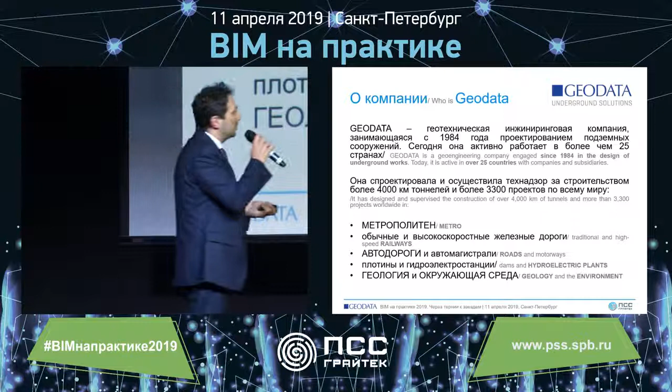Why am I here today, and why am I not here today? I am not here to bore you with another boring conference, or at least I hope not. I am here to explain, first of all, how difficult it is dealing with BIM in underground projects, in a company that develops underground projects and infrastructure projects.

Why? First of all, because we don't have a single element located in a specific position. There is a high relationship with the ground. We have to deal with many software that have to be interfaced, and we have to force them, because many times we have to ask the software to do something it is not able to do. So we have to program. And above all, we have to deal with people.

So the change is very challenging. Many people tell you, why do we have to change, why switch to BIM software instead of CAD, because we are able to use CAD. Another important sentence I heard across last years is that BIM will do everything automatically. It is not true. BIM doesn't do anything automatically. You must know the software, you must know the limits of the software, and then BIM can do most things automatically.

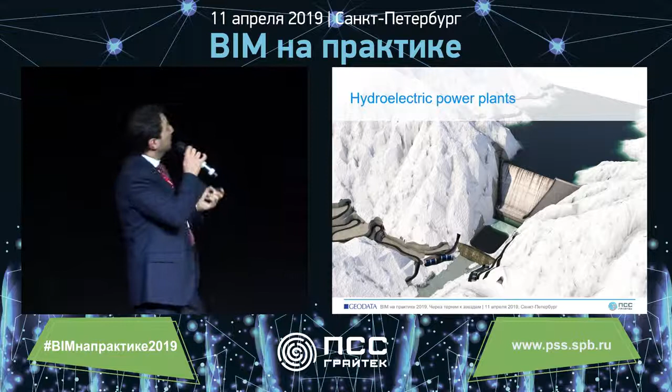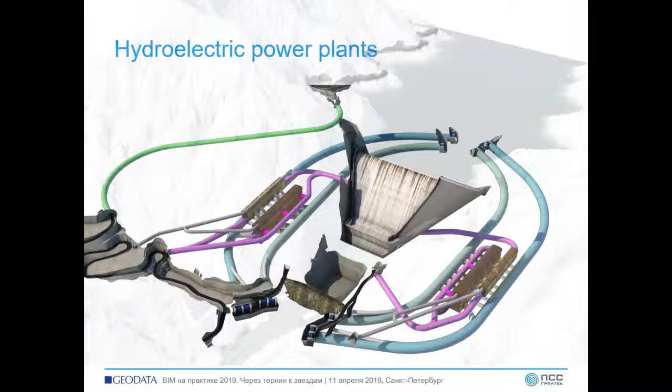Going deep into our topic today, I'm going to show you how we realized a hydroelectric power plant project. It's a very complex project, because we have a lot of elements, and each element had to be modeled and designed with different software. So this was the first important challenge for us.

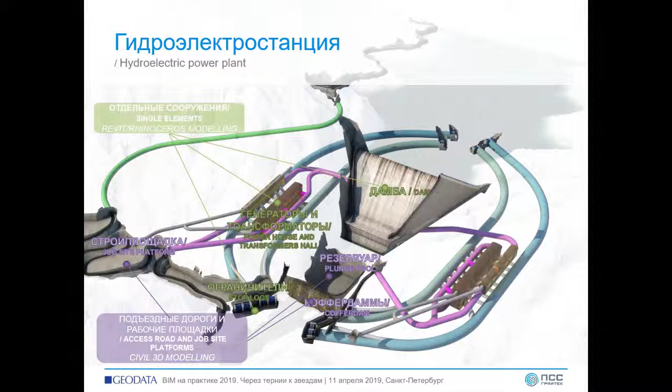First of all, we had to realize, using Civil 3D, the job site platform, cofferdam, and plunge pool. Then we switched to another software, Revit and Rhinoceros, to realize the dam, powerhouse, transformers hall and stop logs. And then, for linear elements such as tunneling, we had to realize the project using Civil 3D, but then we switched to Dynamo and Python to realize the model inside Revit, just to put information inside that.

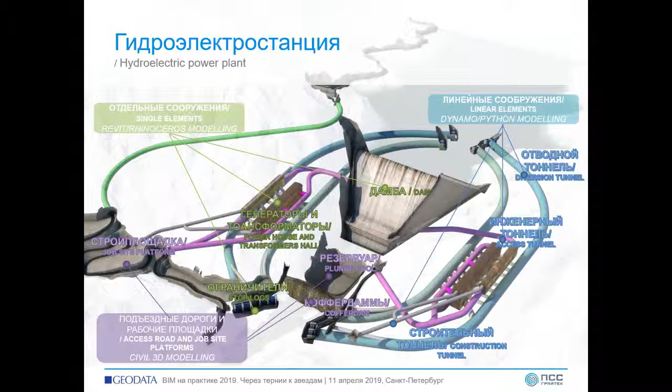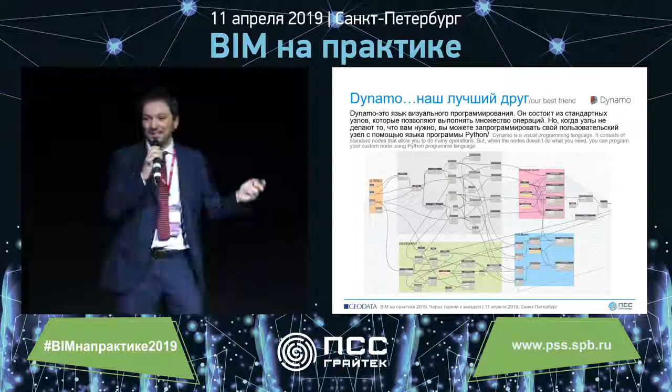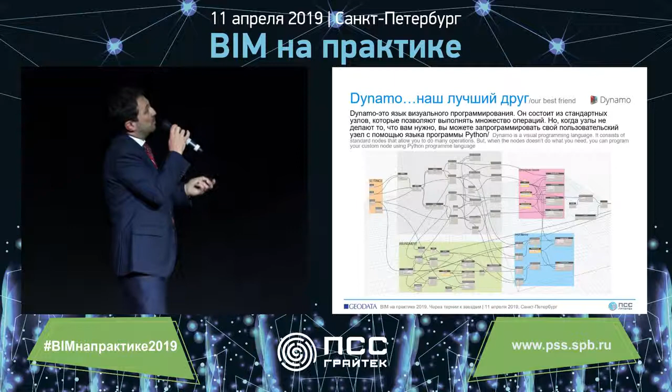What is Dynamo? It has been presented just a couple of minutes ago, but I would like to state something more. Dynamo is a visual programming language. It is very simple because there are a lot of compiled nodes, so we can just choose the nodes we have to use, connect them with logical connection wires, and then we can realize the whole automatic process inside our model.

But what happens if we don't have the nodes that can do what we have to do? We have to program it. So we have to switch to Python, and we have to realize our custom node. This is a little different from Dynamo, because we have to be able to write the code, so we have to know the syntax of the programming language. Python is a simple, object-oriented programming language, and the most important thing we can do with Python is enter inside the software with the Revit API. So we can break any barrier located between us and the software, and we can do whatever we want.

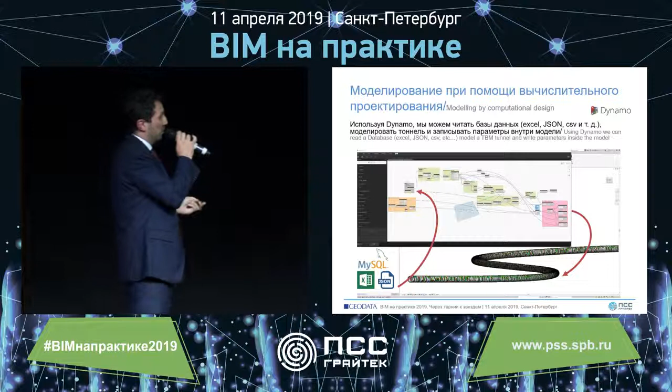How do we use Dynamo and Python? We realized a workflow, a code, in which just by taking input information from an Excel file, JSON, or MySQL, we can realize the tunnel.

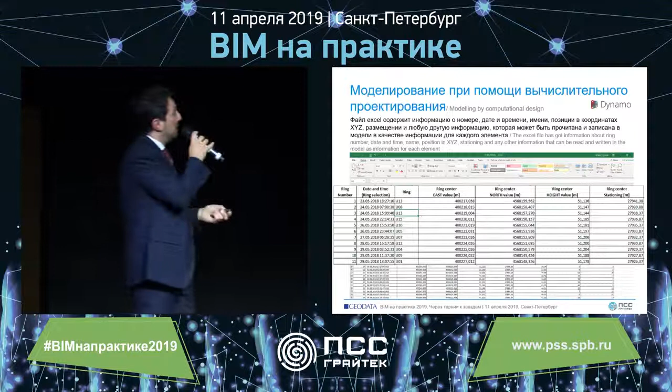So we start with an input data Excel file, for example, in which we add X, Y, Z coordinates that arrive from the alignment, and other parameters important to model the TBM tunnel. Just by reading the coordinates, we are able to recreate the alignment inside Revit and put each ring of the TBM tunnel in the right position and with the right rotation. This is the rotation of the element.

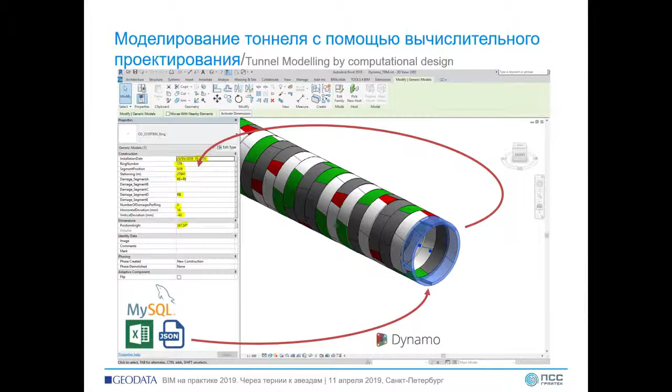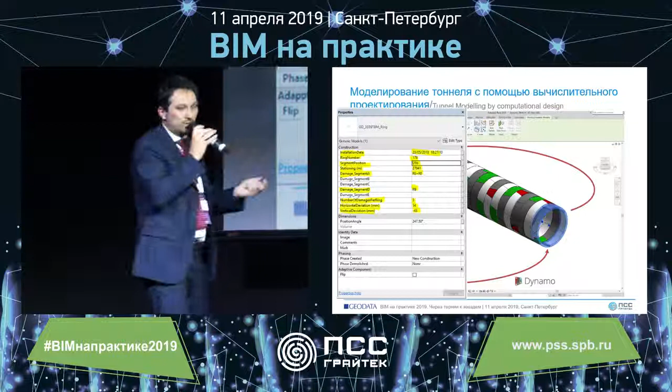Yes, because these colors are not casual. This color represents the correct position of the ring and its correct rotation. But moreover, the most important thing is that when we are modeling it, we can also write information inside each ring, such as installation date, ring number, segment position, stationing, the damages found during construction, and also the horizontal and vertical deviation, just to make a comparison between the design and the construction.

Well, we can deal with Excel files, JSON files that are located in your local machine. But what about cloud-based files? We can just create our custom node with Python, connecting the model to a database, to a MySQL database, and just write all information inside MySQL, or simply read that.

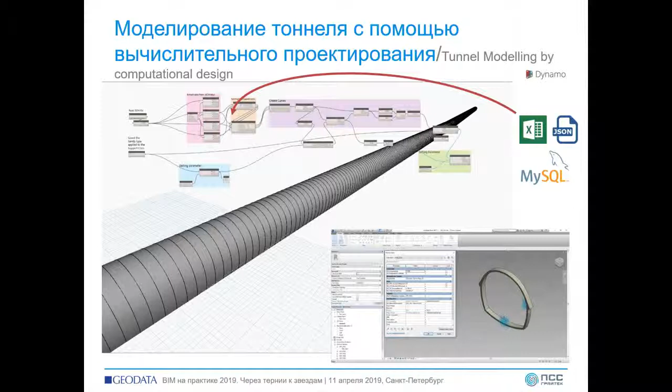This is another kind of tunnel. This is not TBM, this is traditional tunnel. The workflow, talking about BIM, is completely the same. Nothing has changed, only one thing: while in mechanized excavation we have a ring that has got the same excavation step because it is prefabricated, so it is the same, in this case it is not the same.

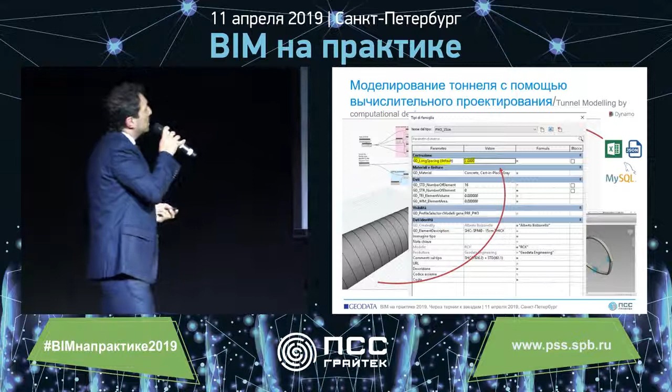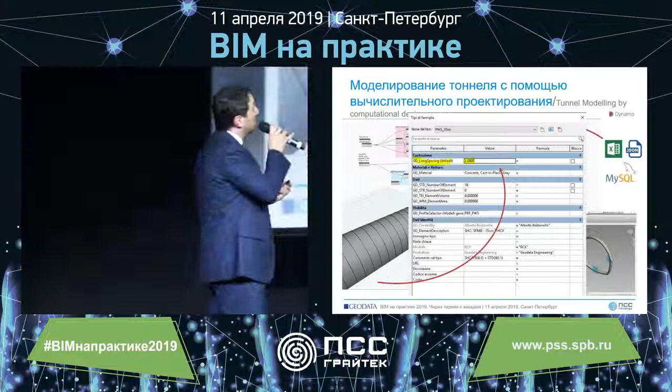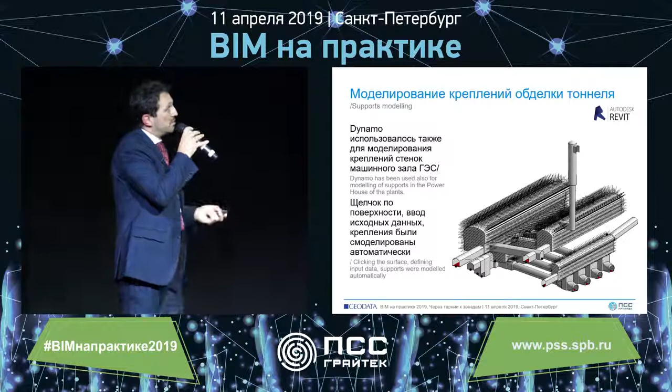When we have to realize the model, so when we have to model each element, each support, in the Powerhouse and in the transformer hall - why? Because there is a lot of interconnection between many caverns, and the only way to check the interference between the supports was to model them. But you can imagine easily that modeling all these elements by hand is crazy.

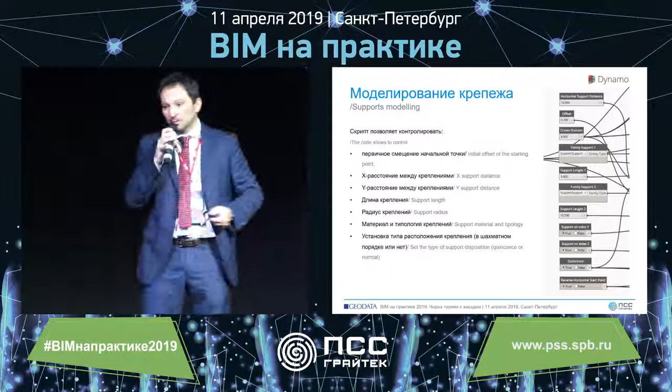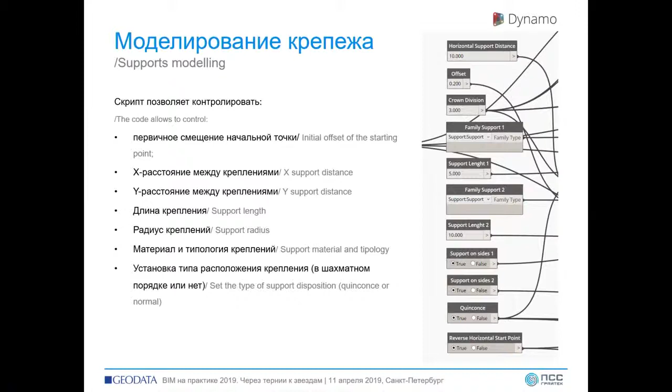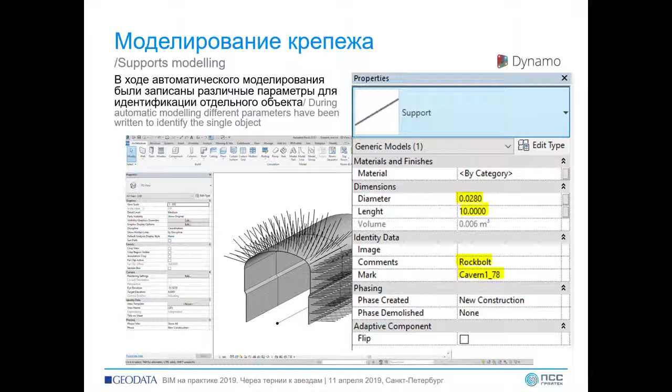So we realized another Dynamo code. Just clicking on the surface and putting a lot of parameters - X support distance, Y support distance, support length, support radius, material and typology, and so on - we can have our model designed automatically. And above all, we can write inside each element whatever you want: diameter, length, name, typology of the support. All information important, very important for the bill of quantities, which is this.

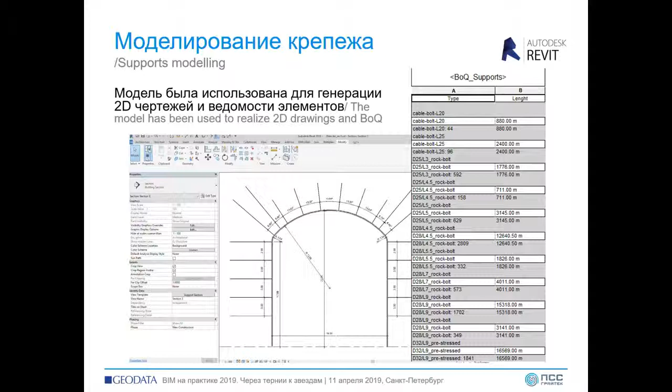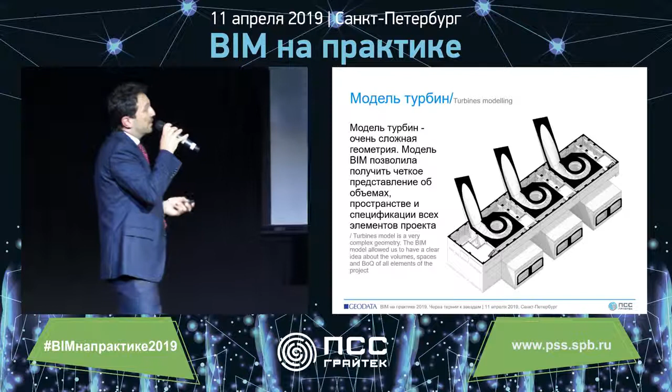And of course the model is very important also for exporting the two-dimensional drawings for the client. Well, we also have to model the turbines, that is a very complex model. We model it using Rhinoceros, and then we import it into Revit, just to have a model that could be informative, so we could put information inside the model using Revit.

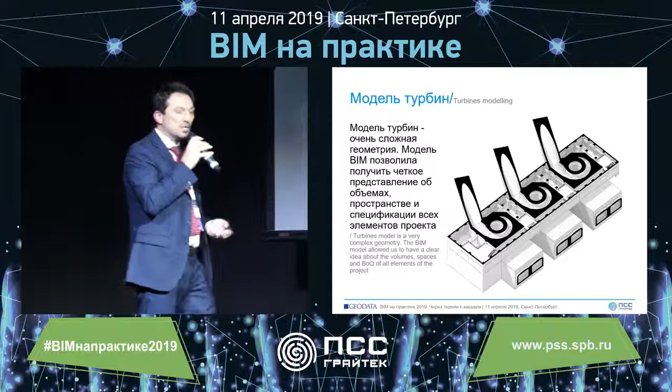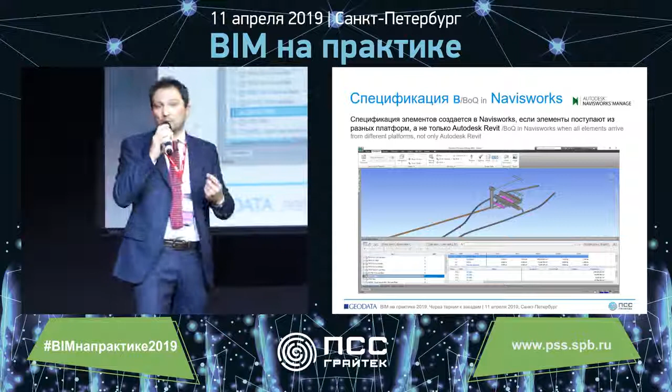And then we use Navisworks to manage the project, and also of course to realize the bill of quantities of the whole project, because the whole project was realized using many software, not only Revit. So Navisworks is a common platform that allows us to import all models coming from different softwares. And here we can read whatever we want, above all quantity of materials. But Navisworks is also important to realize 4D and 5D simulation.

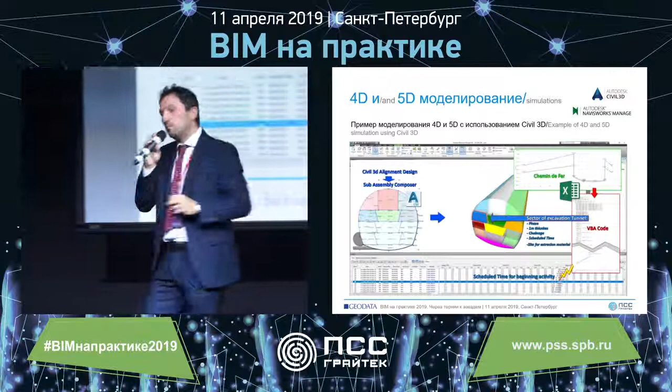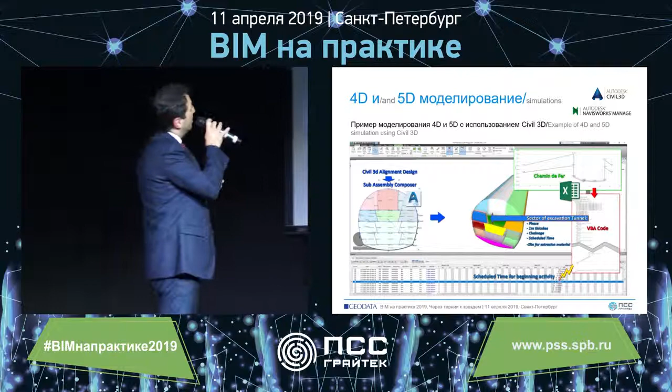We can realize a model connected automatically with the plan, with the Microsoft Project plan, giving the connection through specific parameters that we have to decide before the realization of the model. But what I want to show you now is another workflow, which is a little bit different, because we started with Civil 3D now. We divided the excavation into different portions, and we split the total bar of the excavation into these different excavation portions using VBA code inside Excel. So just to show you there are many ways to achieve an objective.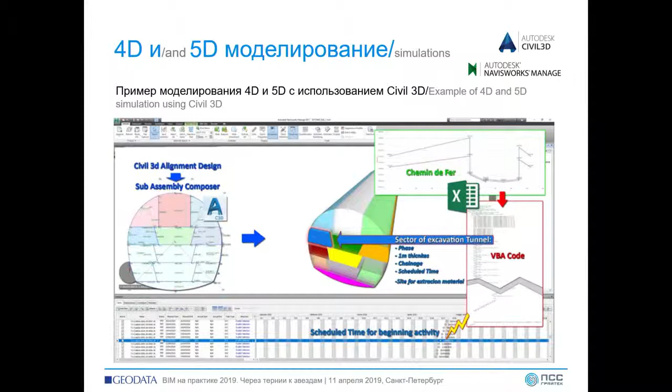Well, I finished my presentation about the hydroelectric power plant, but I would like just to show you something more. So I would like to show you many experiences we had across last years, totally different one from the other, very quickly.

This project, this station, is located in Santiago of Chile. This station was built in 2004 with an empty space realized for the future crossline that we had to design just a couple of years ago. In the first instance, we had to realize a survey. You can imagine this is a very complex geometry, so with the traditional CAD survey it was quite not possible, it was crazy.

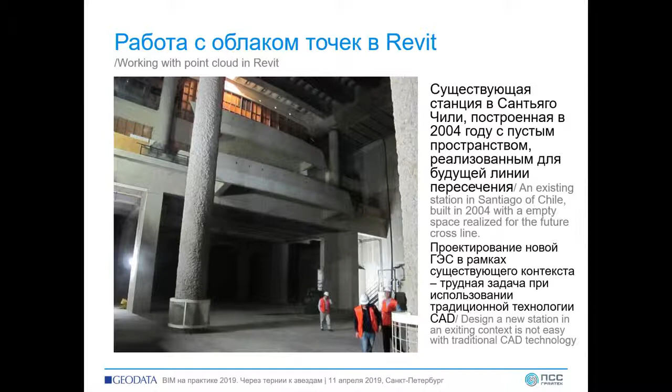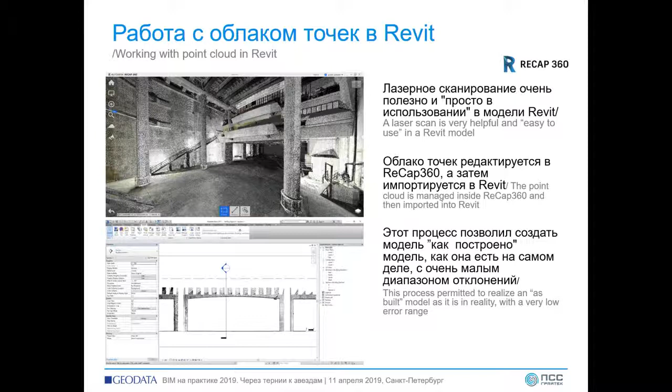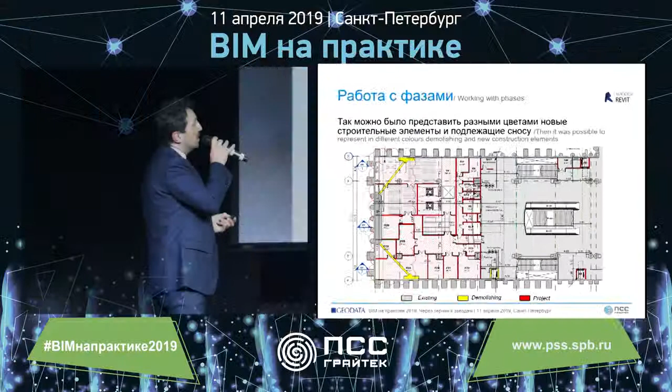So we decided to use a laser scan survey, we imported it inside Revit, we modeled the whole station depending on that, and we were able also to use phases inside Revit. So the gray color is the existing station, the red color is the project, and the yellow color is all demolishing.

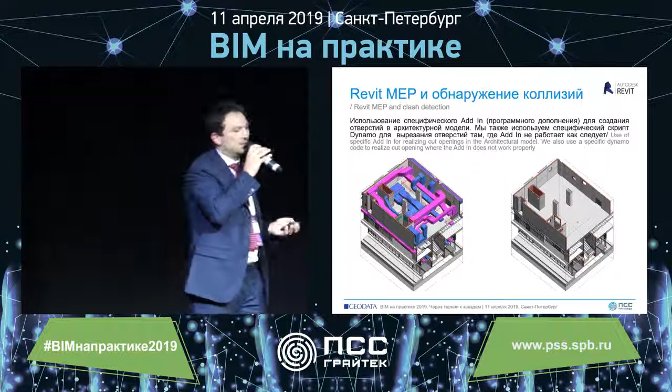Another experience is about the cut openings. This is just a portion of the station. In the big station, we had a lot of ducts and pipelines that intersect many architectural walls, so we had to create voids. How can we do that? We use a plugin to do all cut openings, and when the plugin didn't work properly, we realized a Dynamo code, as always.

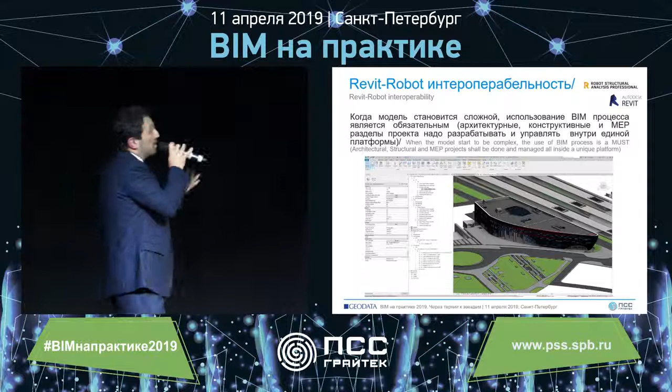Another important project is a station located in Russia, in Moscow. This is a very complex station. We are managing it from architectural, structural, and MEP points of view. But what I want to show you today about this station is how we realized the structural model and how we imported it inside Robot.

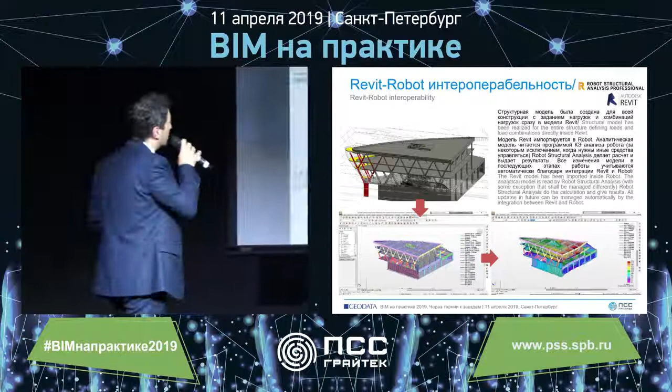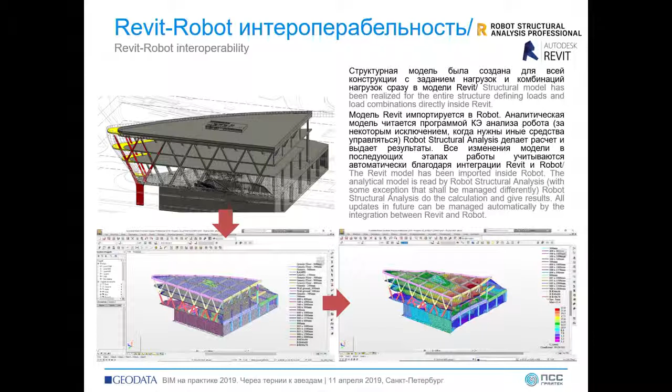This is a very complex structure. These columns are not vertical columns. So we had to realize the whole structural model, paying close attention to the analytical model, to the connections between nodes, and to the connections between plate elements. Then we imported it inside Robot and calculated it.

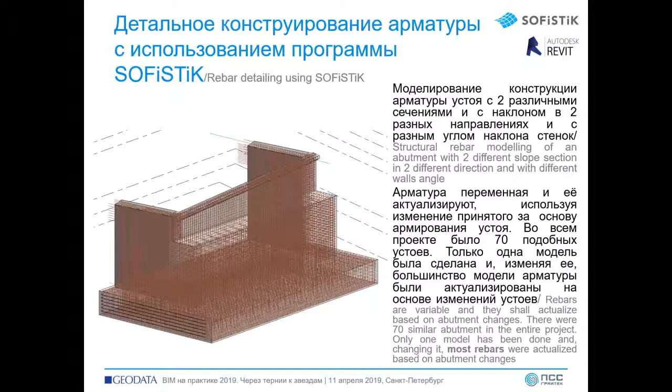Another experience we had was about the abutments of a bridge and the rebar of that abutment. We are talking about 70 abutments. In this project there were about 35 bridges, so 70 abutments, very similar between themselves. So we decided to create a prototype, just one parametric family, and then we realized the rebar inside that. At the end, we just changed the parameters: the thickness of the wall, the height of the wall, the dimension of the foundation. Most rebars, not all, changed.

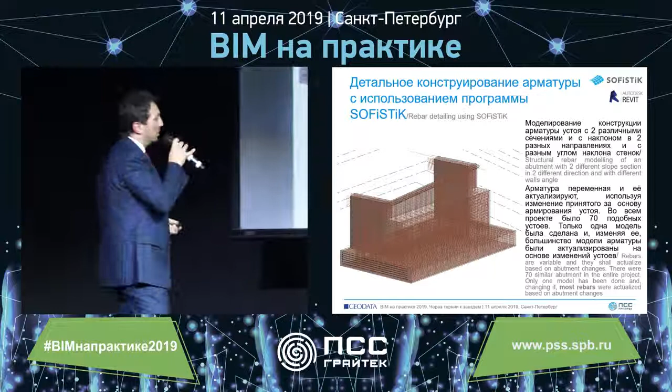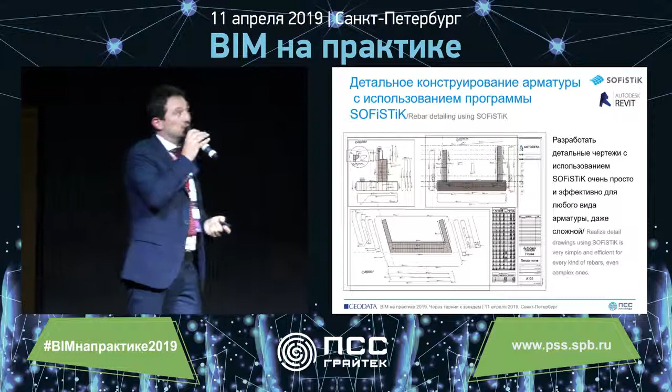So I would just like to state what I was talking about before: not all is automatic, you have to be careful about that. SOFiSTiK is very powerful to also create the shop drawings, so the detailing of rebar.

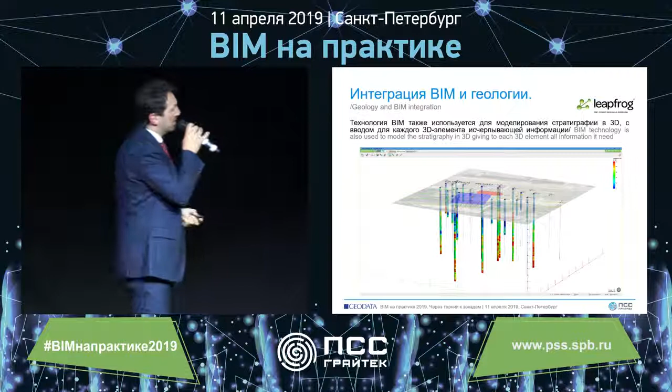And we had experience also in geological modeling. We are using Leapfrog. We put all the information about the investigation in, and Leapfrog is able to interpolate all information and create a stratigraphy. We just have to put our model inside that and verify all critical points.

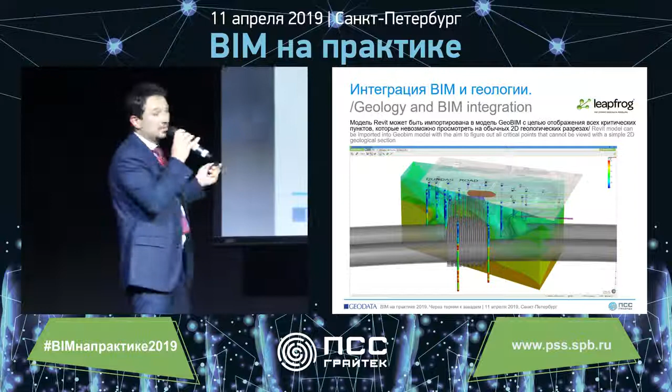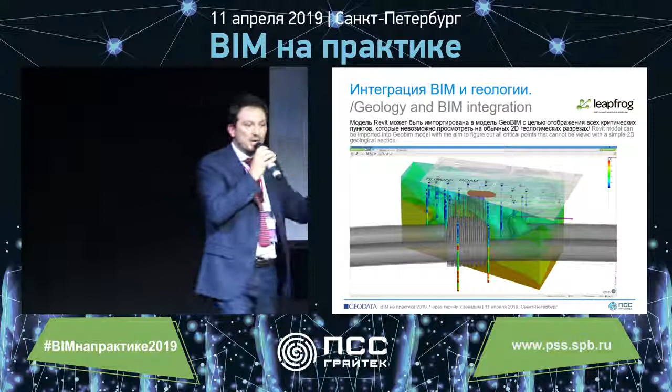What we are doing now, and unfortunately I can't show you right now because we are still studying it, is a new code that is able to recognize the stratigraphy, its geological and geotechnical characteristics, find the intersection between the stratigraphy and the model, and show you what the critical points are. In this case it's not very important because this is just a single element, but what about a very long element, like an alignment, like a tunnel, like 20 kilometers of tunnel? If there's something that can do this for you automatically, it's very, very good, right?

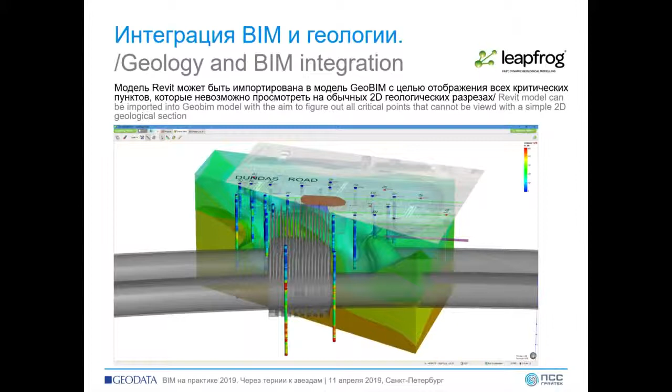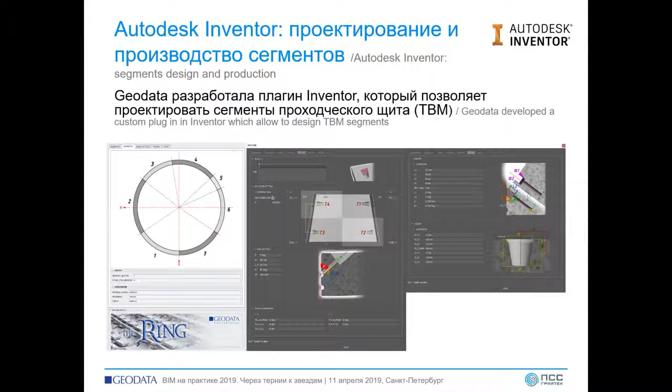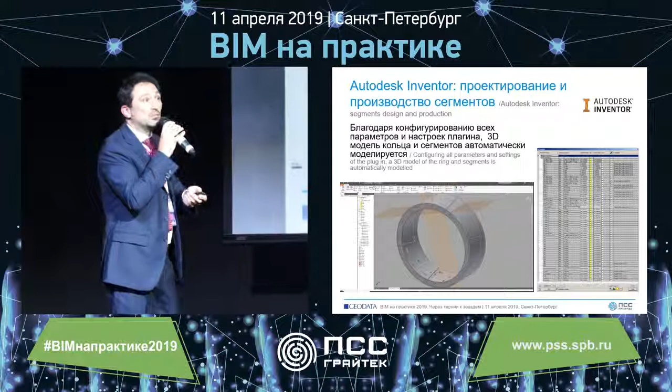Finally, our last experience is about designing the ring, designing the segments of the ring. We realized a plugin inside Inventor. Just by putting all the information inside the plugin, we can obtain the 3D model as output with all details. I don't know if you can see that, but there are a lot of details here. And of course, we can also realize the two-dimensional drawings for prefabrication.

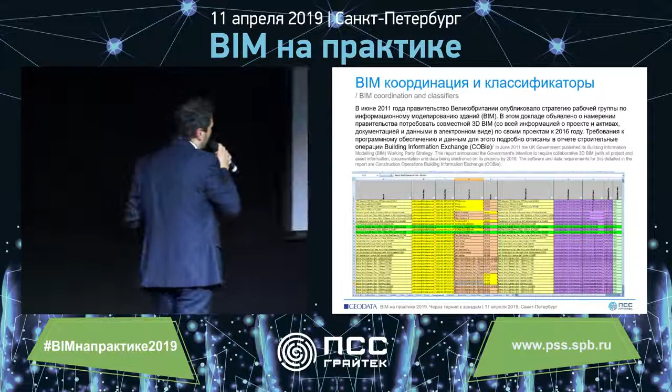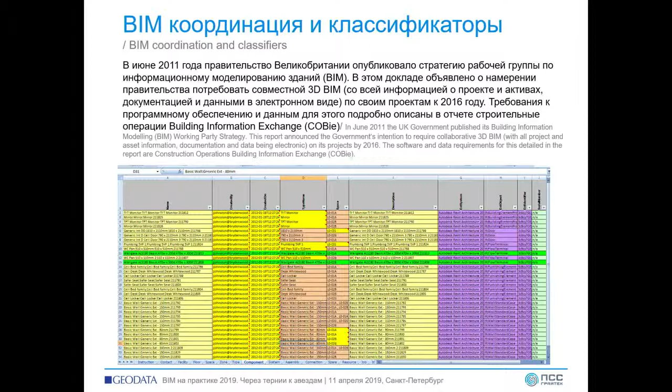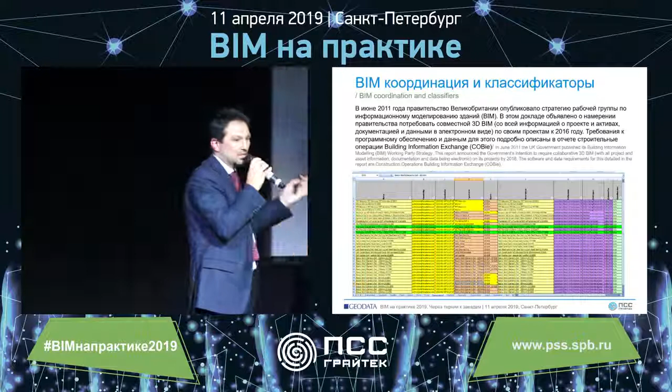I have finished my presentation about our experiences. I would just like to show you two other topics. The first one is about classifiers. We talked about classifiers in the first step of this presentation. Unfortunately, we don't use classifiers right now, and this is a huge problem for us, because at the beginning of the project we usually define the classification with the client, how to call the family, how to call the parameters, which parameters we need, and so on. So at the end we can deliver the project, but only us and our client can read it. So we are considering switching to a standard international classifier in future projects.

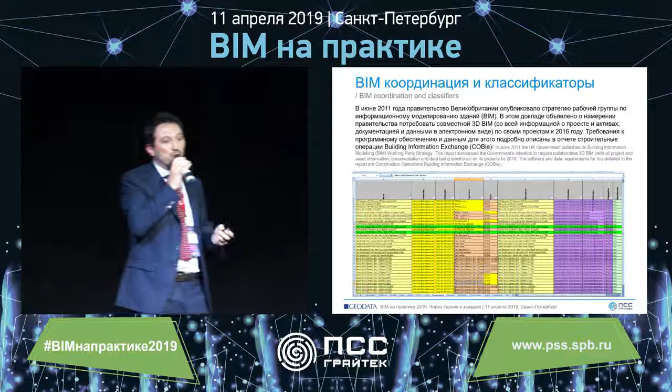And probably we will use the COBie standard for the next project, which is a big project in which they are asking us to realize a very big project with a high level of development, because they want to use the model for maintenance during operation.

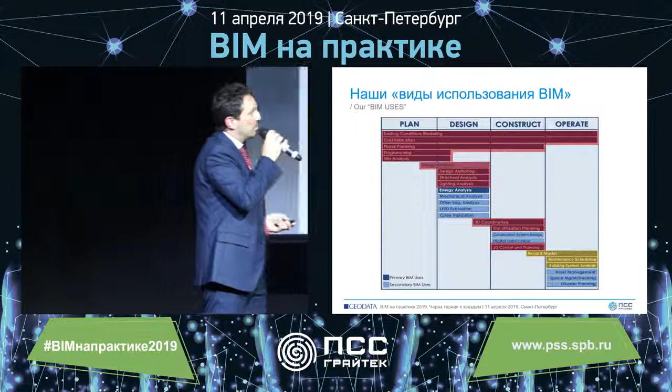Well, I have finished my presentation. I would just like to state one thing more: all the things you have seen today were not done only by me. There is a very huge team behind all this, which is GEODATA. I would like to thank all my colleagues and ex-colleagues who helped me achieve all these objectives. And of course, thank you so much to everybody for your attention.